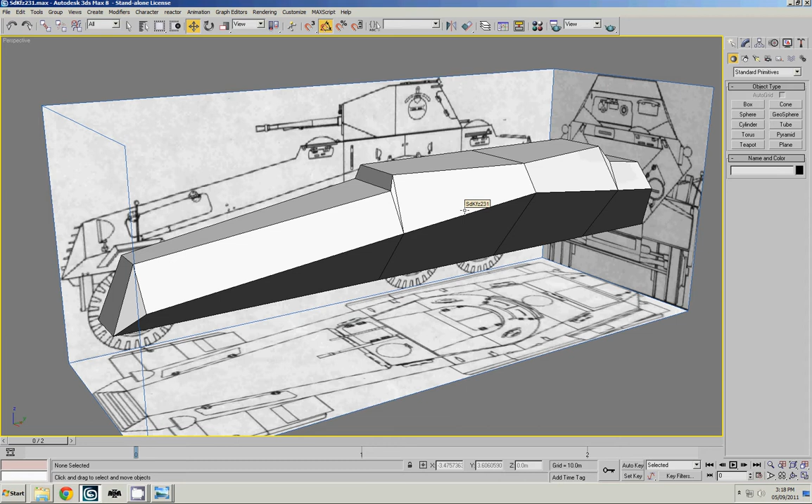So far we've modeled a little bit of the body and we haven't done the bottom or anything like that yet, and we've only modeled half of it. So in this lesson I plan on covering the creation of the turret, but before we do that I'm just going to quickly make a couple of modifications here to the bottom so that we can close it off and then mirror it before we get started on the turret.

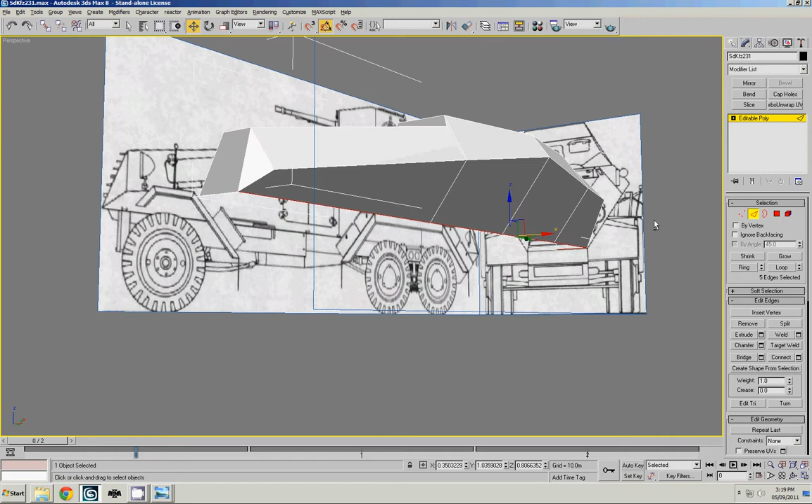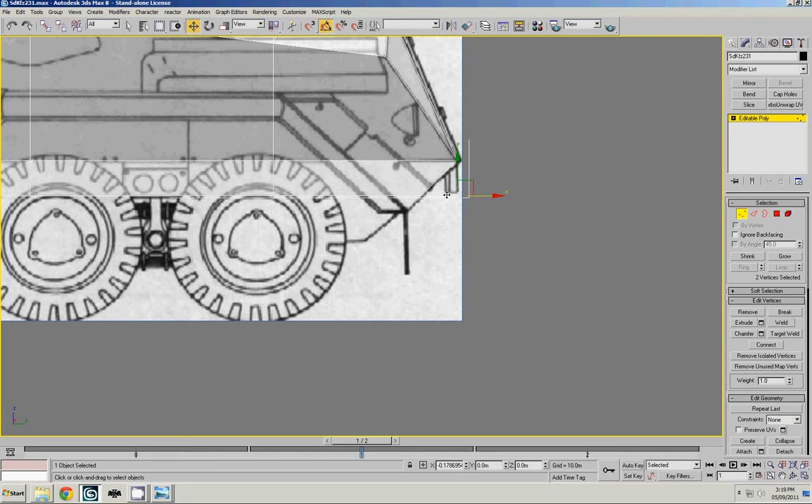So what we're going to do is we are going to again extrude the sides. Now this isn't going to be 100% accurate, and the reason for that is because I just want to do a quick job. So this blueprint is of the 1939 model, so we are just going to bring it down about this far and then modify the back. Oops, that's what happens when you press the slash button as opposed to the right arrow button. I'll modify the back so that it looks appropriate, and then we'll just leave this front part here for now and we'll revisit it later.

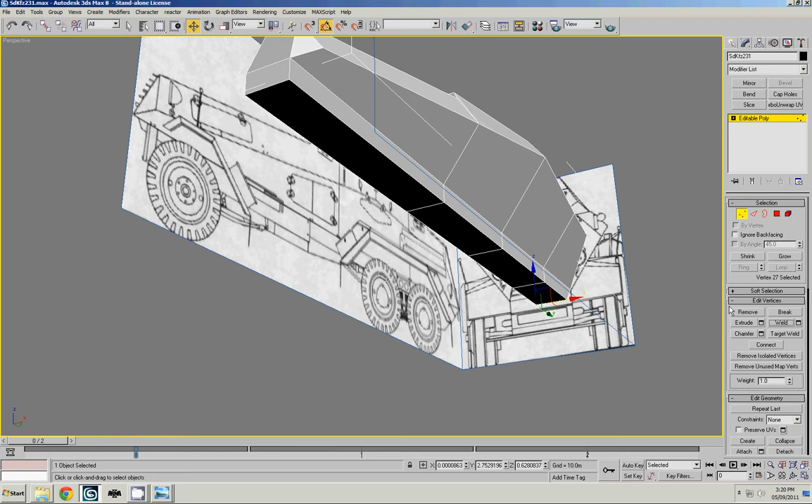So if we take a look at it from the 3D perspective, here we go. This is what it looks like, and what we're going to do, again, we're just going to deselect this, deselect that, and then move it over just a little bit until the X is at 0. And then we'll weld those two vertices until they're 1, and then weld those two vertices until they are 1. So now we have an entire half of the body. This is essentially one piece.

So as I told you, there are two ways that you can start modeling. You could do a half and then mirror it, which is what we've done so far. So just to complete that off, we're going to show the complete mirrored model with, of course, some modifications that we have to do in the front, and I'll show you guys how to attach it before we move on to the turret. So once you've mirrored it, you convert it to an editable poly, and so essentially this is now still two separate pieces. As you can see, the newly created polys have been selected. However, if you move them apart, they're not attached.

So we're going to fix that right now by going into Vertex Mode, checking out the front so that we could see all the vertices and select them. So as you can see, 28 vertices are selected. So we're going to select the options here, and I find that a good threshold is 0.0001. And if you do that, you essentially get all the vertices that are almost on top of each other, because sometimes it groups the ones that are close to each other, so we don't want to do that in order to keep the model's original shape.

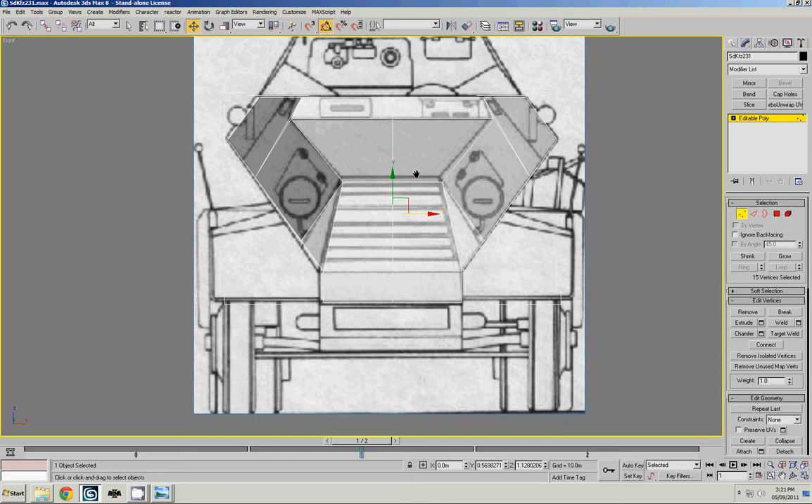Now that there are half the number of vertices, it looks like we've actually missed something somewhere, because 28, if I'm not mistaken, divided by 2 is 14. But anyway, we'll figure that out later. Obviously you should figure it out now, but as this is recording, I'm just going to figure it out later. And we'll actually find out as soon as we remove these edges. So we're going to remove these edges, and by these edges, I mean the edges down the middle, so that we get rid of that seam.

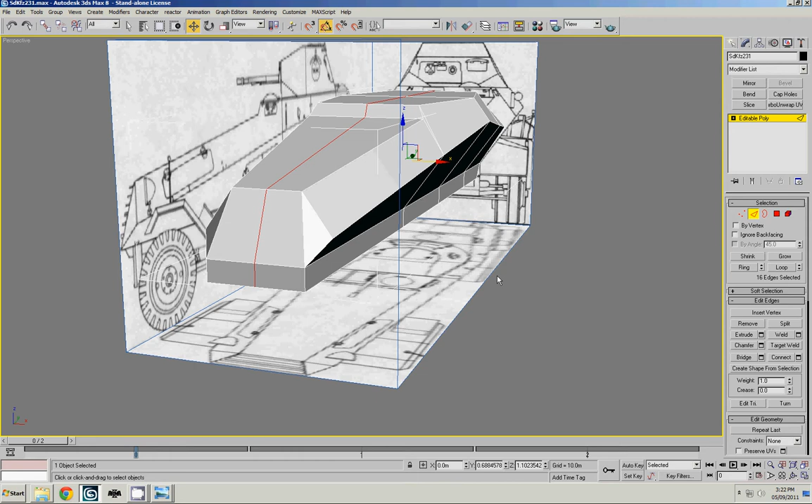So go into Edge Mode, select everything that is close to the seam, and then press Alt and click and drag to deselect the edges you want to keep. So there we go, we have 16 edges. Now as you can see, it's all around the middle. So what we're going to do here is not press the delete button. This is what happens when we press delete. Oh my god, most of my model is gone. So press Ctrl Z to undo it.

We're going to press the backspace button, and what that does is delete the edges while keeping the vertices in place. And as you can see, it didn't delete these edges, which means these vertices did not weld. Most likely it's these two right here.

So that's not working for some reason. So let's just take a look at how we would deal with something like this. Select one, move it aside, target weld the two suckers together, go back to Edge Mode, and then backspace. So now we're good. So then you go back into Vertex Mode, go to the front so that it's easier to select all the vertices in the middle.

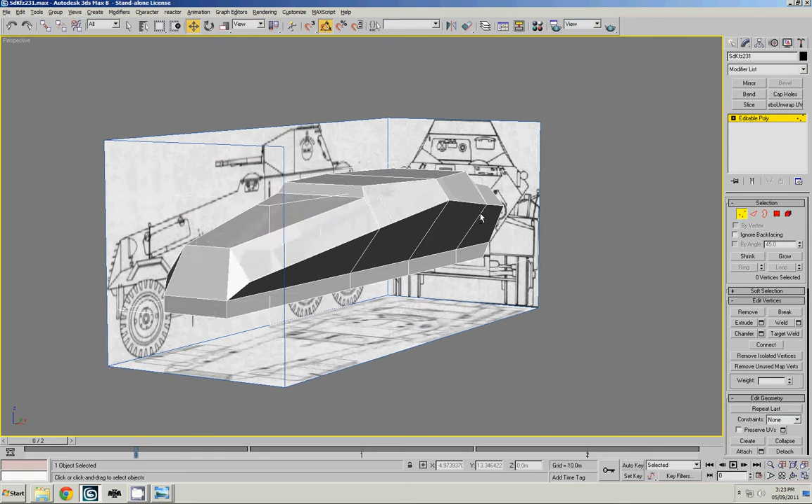Now we have 14, the appropriate number of verts, and then press backspace again, and everything that was down the middle is now gone. So no vertices, no lines, and you now have one solid object. So as we can see, it's really beginning to take shape here, from the back and from the front.

So what we're going to do now is we're going to focus on the turret. And the best way to build the turret, or at least the fastest way that I found, is to start from the top and create a cylinder. So let's just stick with the default 18 for now, and we're looking to make it about this size, and you want to move it again so that you get the height as well. I know it doesn't look like you're getting the height from the top, but as you can see, you are. So there are 18 sides and 5 height segments.

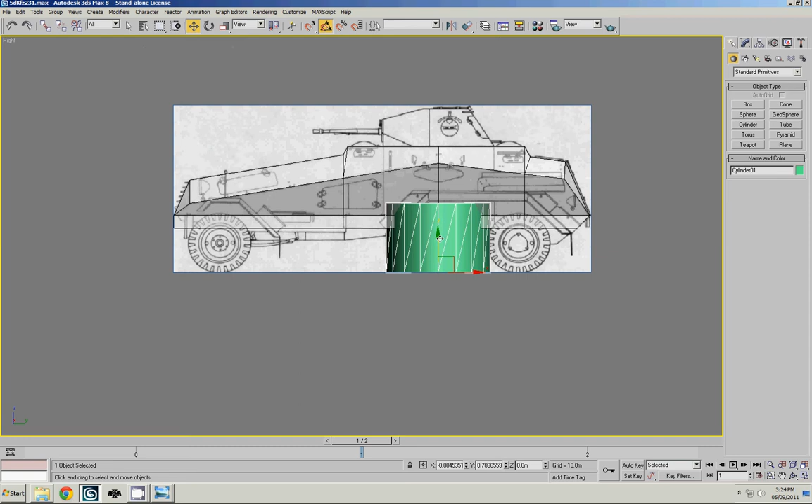So right click the height segments because we don't need those, and then let's start adjusting them. So press W again to get this arrow, and then bring it up so that it touches the top of the body. Of course, how accurate you want to be is entirely up to you. I prefer getting it directly close. There we go. But look at that, that's too high.

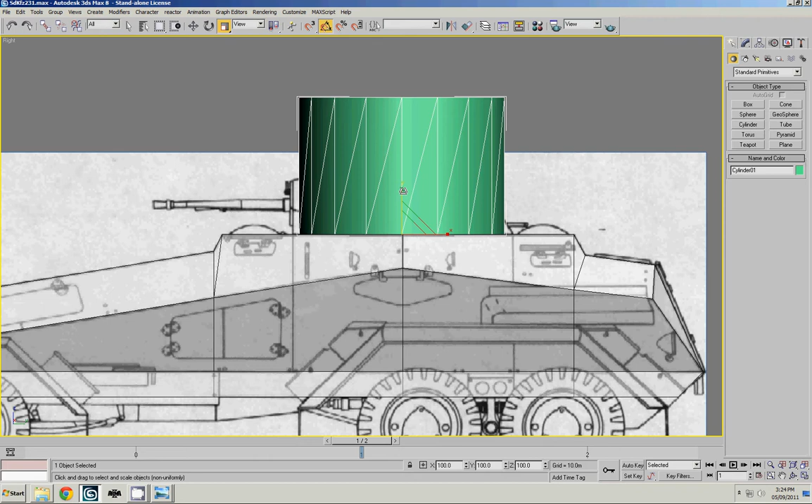So I'm going to teach you now about the Deform. I call it the Deform. I don't know if it has another name. But anyway, it's this button right here. So if you press Alt X, it kind of makes it translucent for now. So we're just going to play with the Y modifier and bring it down to the appropriate height. Great. So what we have now looks like this. It's a nice cylinder that's approximately the same size as the turret we're looking for.

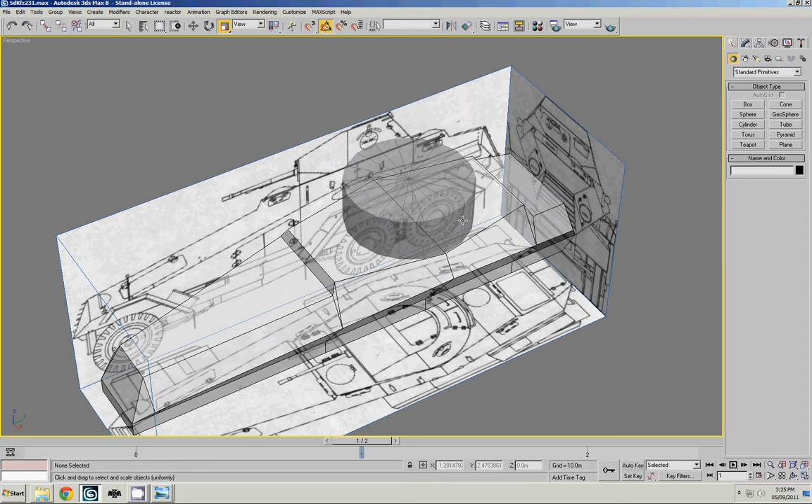Now what we're going to do is we're going to delete half of the cylinder. So because we're going to do that, we can afford to add a few more polys to kind of round out the half that's going to stay. So before we convert this to polygons, we're just going to increase it here. So we'll make it around 26. 26 is good. Gives us that line right down the middle as opposed to an odd number. So we'll just keep that for now. Adjust this a little bit and maybe play with the size a little bit more until we're happy with the way that it looks.

So speaking on playing with this modifier, if you select this inner triangle, it affects it on all 3 directions, so the X, Y, and the Z axis. But if you select this little strip over here, and you can see the difference over there, it only affects it on the X and the Y axes. And the same thing for the different viewports that you are viewing at the present time. So we'll leave it at this, and then we will convert it to an editable poly.

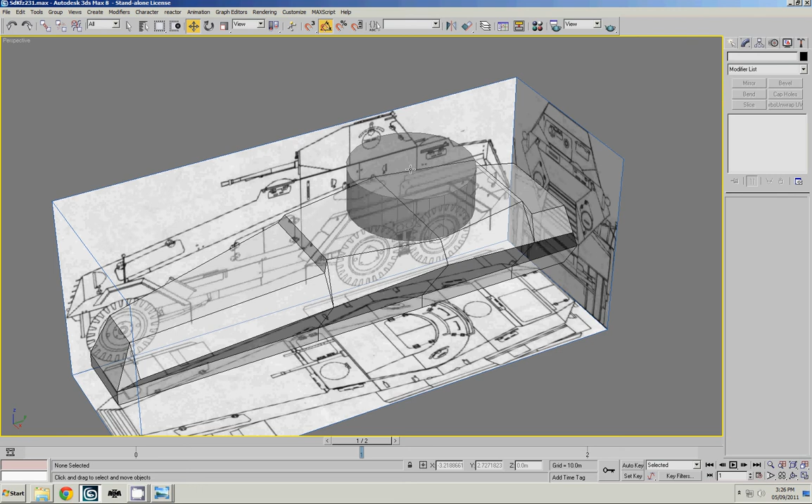Now one thing about the menu, once you right click, you can either go to convert to editable poly every single time, or you could just right click and then left click on the transform menu and it just redoes your last action. So one thing that we noticed when this was a mesh, it had all these wonderful triangles up top, but those are now gone as a poly, which for our intents and purposes actually works out for us. So let's grab these vertices from the top and then play with the X and the Y here until they match the inside of the turret. And there we go. We've got something that's pretty similar in shape, and it's a good starting point.

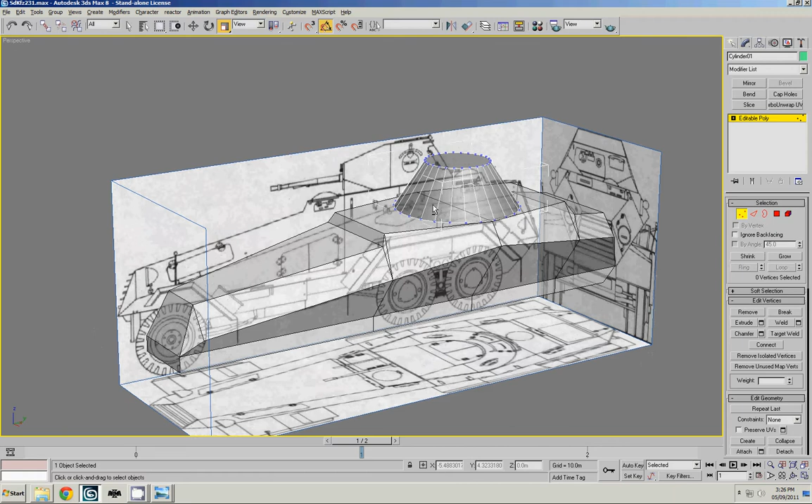So what do we do next? Because it has that odd shape, right, and the triangular angles, I'm going to teach you a few more tips and tricks here. So what we're going to do, we're going to delete half of this cylinder. It's going to delete the top and the bottom faces as well. And you know what? We're fine with that for now.

So let's delete that. What we're going to do now is we're going to grab these 2 lines and extend them. So press Shift and start moving them down to about here. Why am I doing that? You'll see it very soon. So ideally, just to save time later, we would just create these faces now. Bear with me here while I do this.

Alright, so as you can see, it's not quite the shape of the blueprint, but we're going to fix that by grabbing both of these edges and then using this deform tool. Now, if it's not in the middle, we're going to fix that, because what we need to do is expand it on either side. So click here, make this go in the center, and then move it about. There we go. You could do the same thing with verts as well.

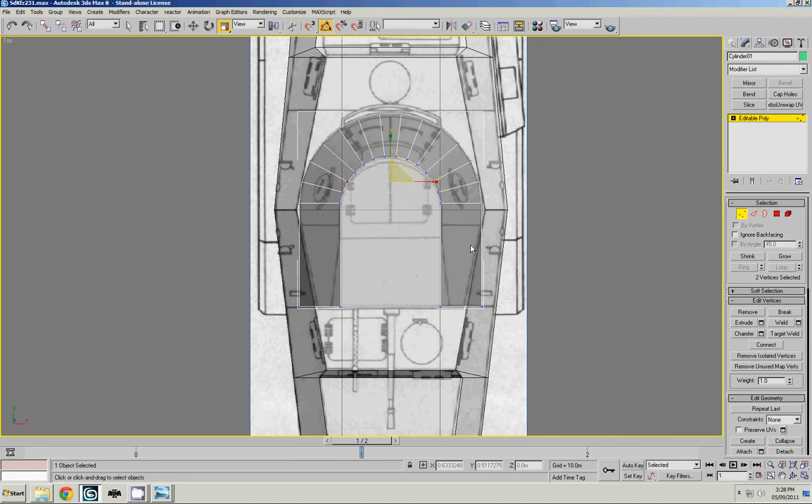And we're starting to get the shape that matches the blueprint. And I think that's good enough for now. So we're almost there, but not quite. Because as we can see, even though it goes this far, there's this little bit that we need to get rid of. The way that I prefer doing this is by using the slice modifier. The slice modifier has a few options. You can refine the mesh, split the mesh, remove the top, or remove the bottom.

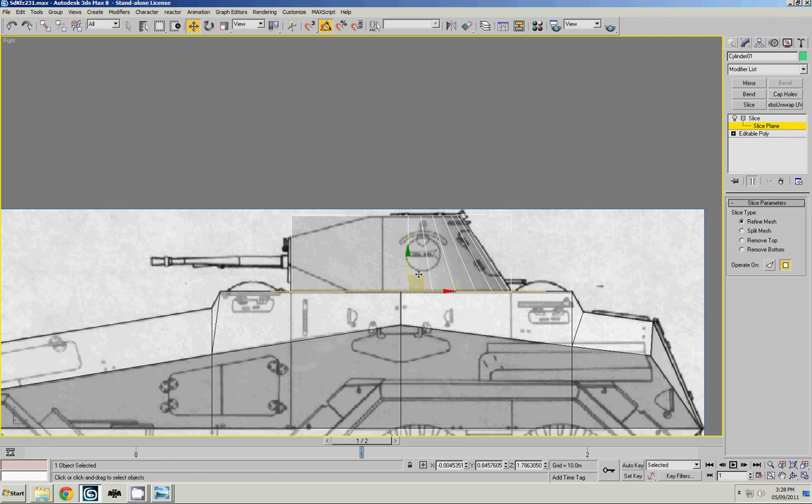So what we're going to do is use this part. You could also use a shortcut, which is pressing the 1 key, and then move it around. So just to show you, that yellow line is the plane where the slice modifier will operate. It's kind of hard to see because of the blueprints, but there you go. The yellow line right there. So if I were to go remove top, it would remove the entire top half of the mesh. We don't want that yet.

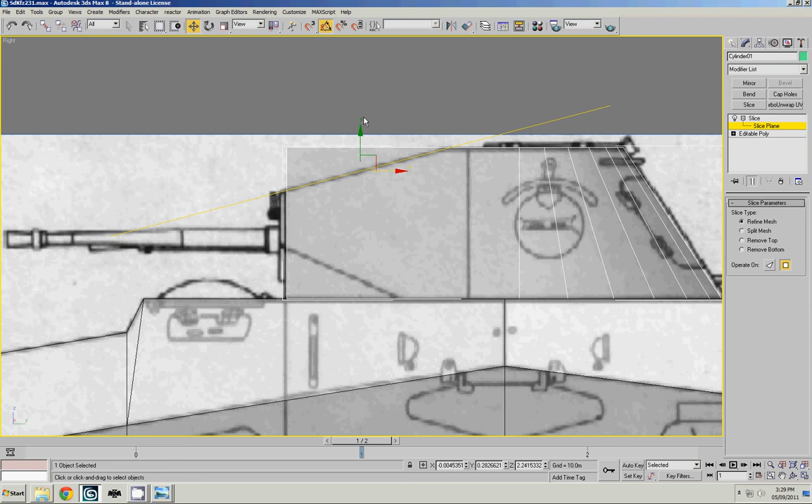So from this view, we're going to move this about and play with it until we have a line that matches this. And as you can see, that was easy. It took us like 3 seconds to do. Now we're going to remove the top, and voila, we have a line that matches our blueprint. So again, convert it to a poly, and then if we take a look here, it's pretty damn close, right?

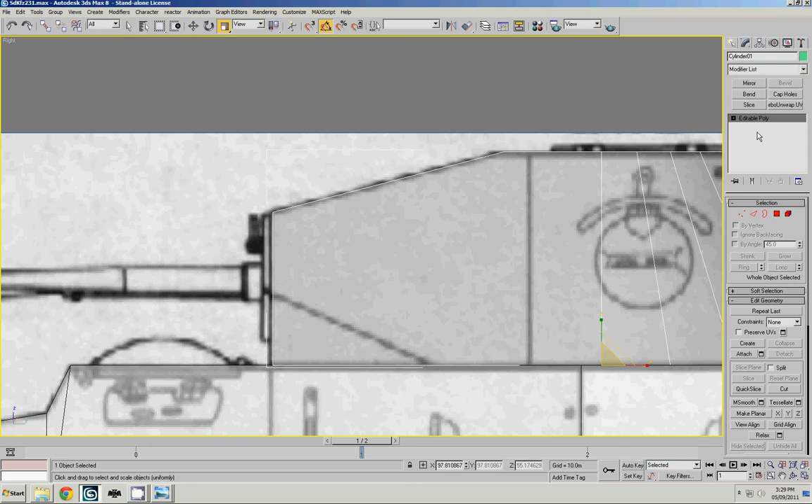We can obviously play with it again because our blueprints don't quite match up on all 4 directions. It's not quite going to be right, so we'll just approximate for now. So what we do here is we create another face to fill it in, and that is done. Now, as you can imagine, we're going to have to do the same thing for the bottom as well. So let's go back and use the slice modifier again. Press 1 as a shortcut, and then move it around. And this time, if I'm not mistaken, we remove the bottom. Perfect. Let's convert it to a poly, and then take a look at what we see here.

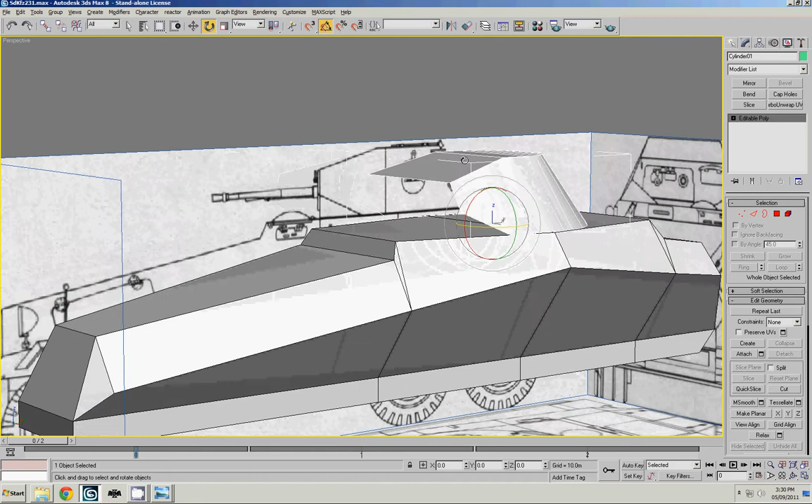Let's just apply our modeling base. And by the way, if you want to get the material editor to pop up, the shortcut is the M key, or you could just press this right here. Alright, so we have that. Okay, so it doesn't quite match. That's probably what you're saying right now. It's almost there, but not quite. So here's what we do. We grab this edge, we bring it down. I'm sure you guys, if you have watched my other videos, already know what's about to happen.

You grab it, you target weld, and then you grab that same edge, you bring it down again. Let's take a look at it from the front. And then we grab these 2 verts, bring it down to here, and then bring these bad boys in. Cool. So now we have the front, we have empty spaces where the triangles are supposed to be, and let's just make sure that we're exactly flat on the Z axis, however you prefer.

Alright, now all we have to do is just create these faces. 1, 2, 3. 1, 2, 3. Press F4 to get rid of the lines, and now we have the turret. As you can see, there's that hard line over this. What we're going to do, again, is make sure that we have the smoothing groups appropriate. So just grab those newly selected faces, and then click on 4.

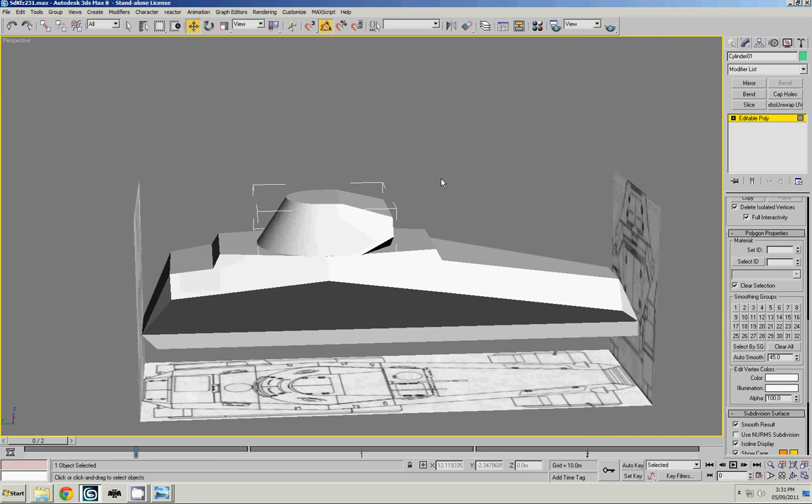Now, these faces already had the smoothing group applied. These ones didn't. So whenever you select multiple faces like that, the ones with the smoothing groups applied will be indicated by the number not being there. So we click on 4, and now all of them have smoothing group 4 applied. And that's what the turret will look like. So that's the quick and dirty way of getting the shape of the turret.

Now, I didn't exactly plan on this being such a short lesson. This turret was really easy to build. So what I'm going to do is pause it, and then think about what part I want to build next. So yeah, as you can see, hopefully modeling is easy. This video will continue as soon as I decide what to do next.